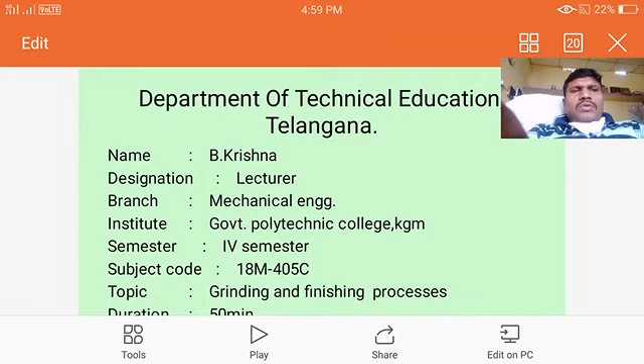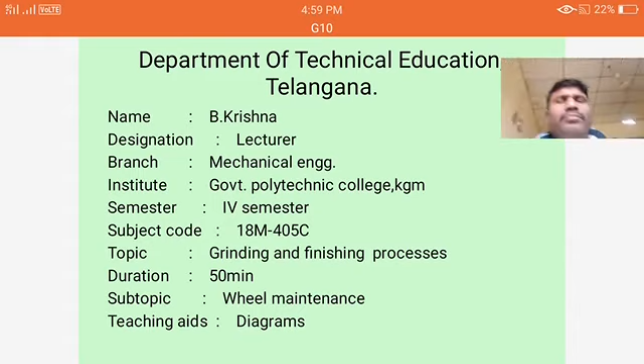Objectives: maintenance of grinding wheel. Wheel maintenance means grinding wheel maintenance, balancing of grinding wheel, dressing and truing of grinding wheels, and coolants used.

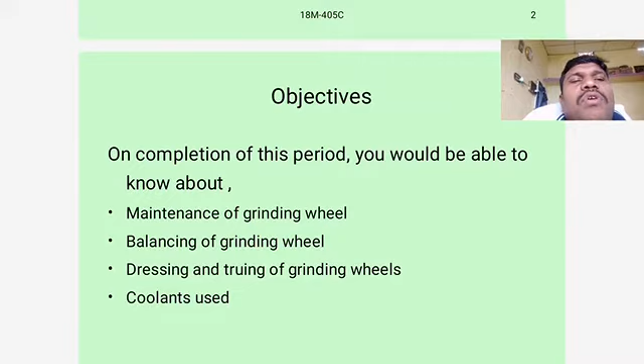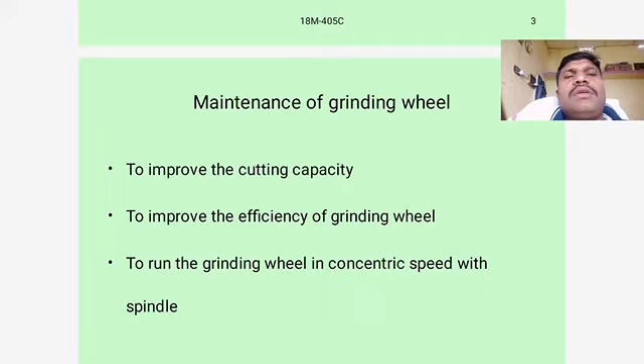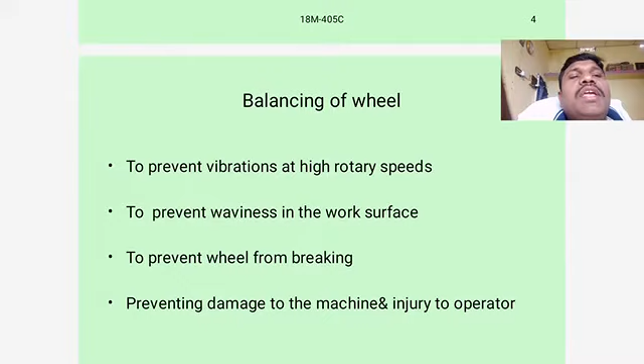Maintenance of grinding wheel is done to improve the cutting capacity, to improve the efficiency of grinding wheel, to run the grinding wheel in concentric speed with spindle, to balance the wheel to prevent vibration at high rotary speeds, to prevent waviness in the work surface, to prevent wheel from breaking, and to prevent damage to the machine and injury to the operator.

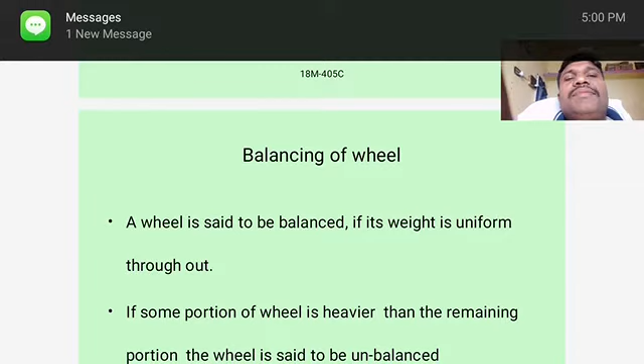Balancing of wheel: a wheel is said to be balanced if its weight is uniform throughout. If some portion of the wheel is heavier than the remaining portion, the wheel is said to be unbalanced.

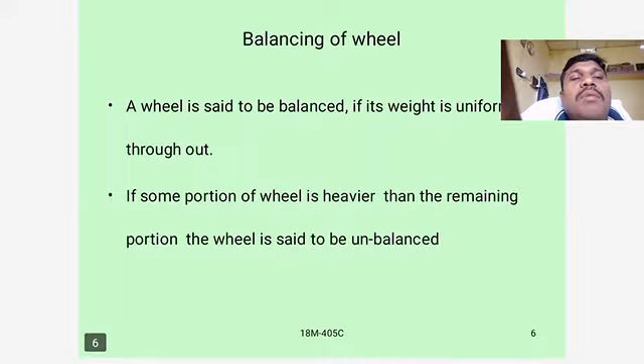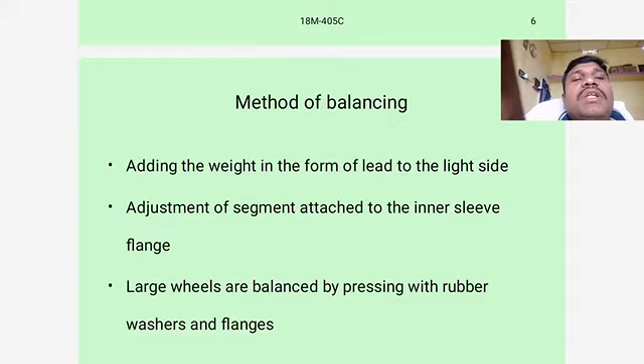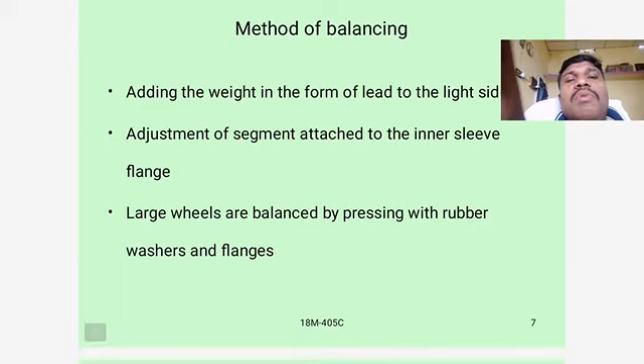Method of balancing: adding weight in the form of lead to the light side, adjustment of segment attached to the inner sleeve flange. Large wheels are balanced by pressing with rubber washers and flanges.

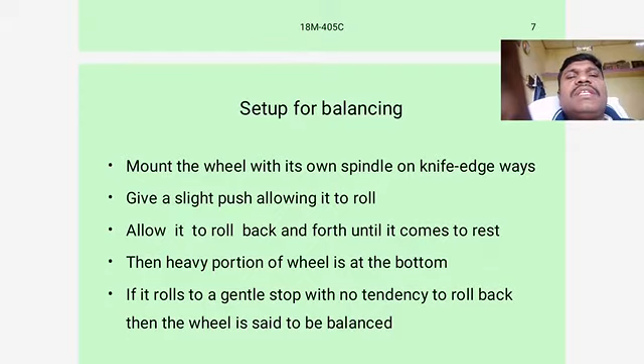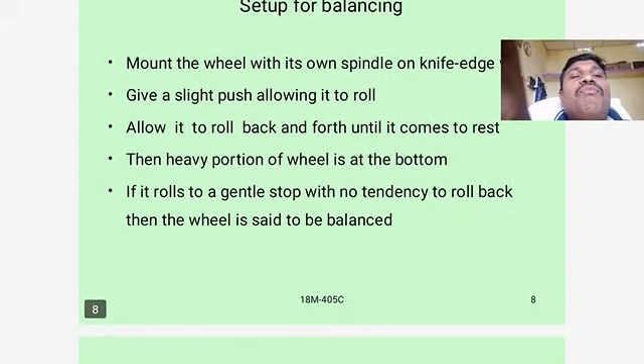Steps of balancing: mount the wheel with its own spindle on a knife-edge ways. Give a slight push allowing it to roll. Allow it to roll back and forth until it comes to rest.

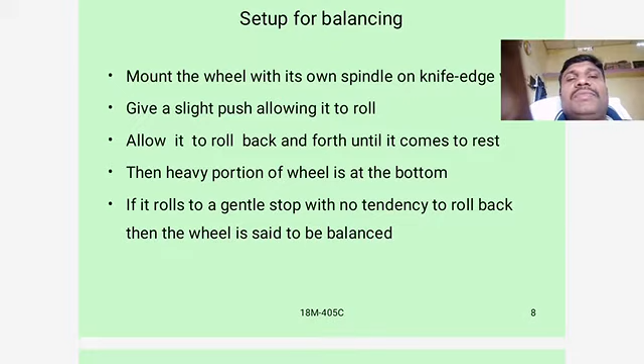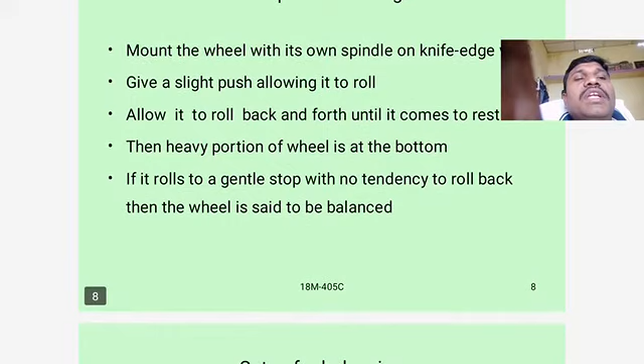Then a heavy portion of the wheel is at the bottom. If it rolls to a gentle stop with no tendency to roll back, then the wheel is said to be balanced.

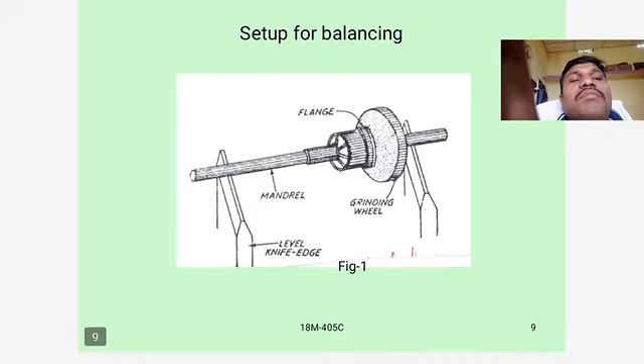Okay, set up for balancing diagram, like this. And the dressing of the grinding wheel: with the passage of time, the grinding wheel's cutting capacity becomes lower.

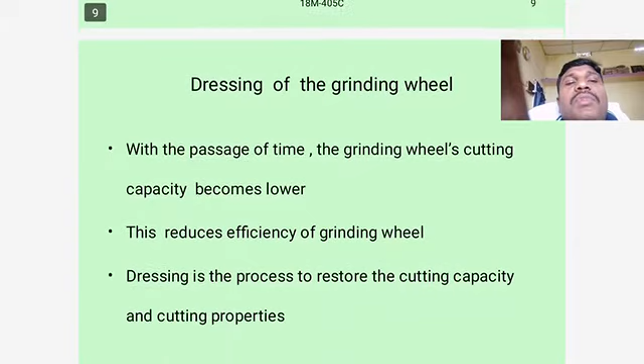This reduces the efficiency of the grinding wheel. Dressing is the process to restore the cutting capacity and cutting properties.

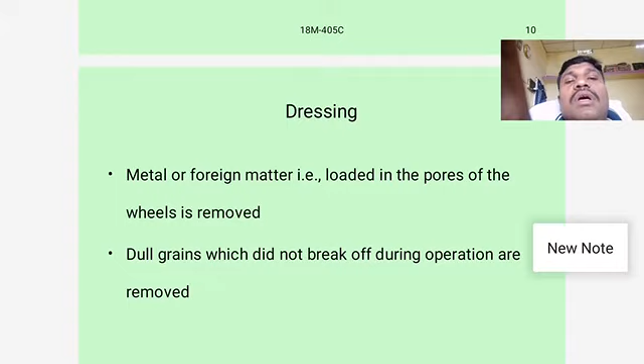Dressing: metal or foreign matter that is loaded in the pores of the wheel is removed. Dull grains which did not break off during operation are removed.

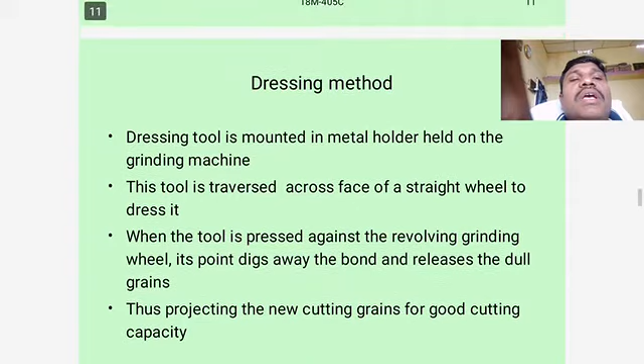Dressing method: a dressing tool is mounted in a metal holder held on the grinding machine. This tool is traversed across the face of a straight wheel to dress it.

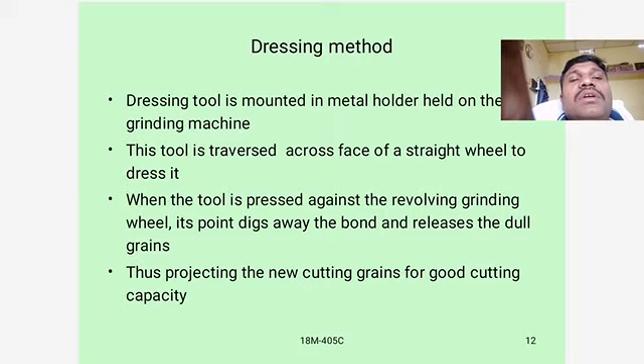When the tool is pressed against the revolving grinding wheel, it digs away the bond and releases the dull grains, thus projecting new cutting grains for good cutting capacity. Grinding wheel dressing is done like this properly.

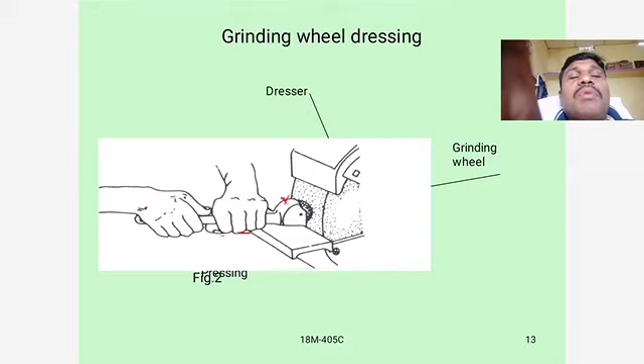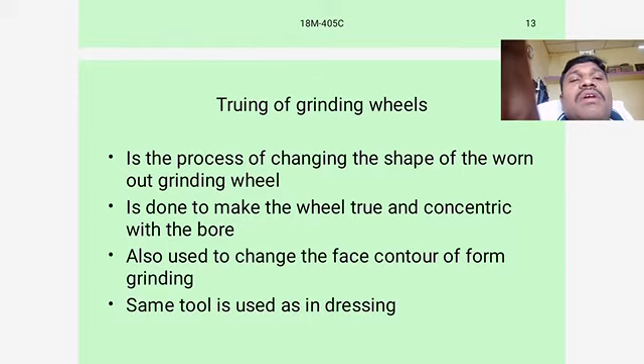Truing of grinding wheels: this is the process of changing the shape of the worn out grinding wheel, done to make the wheel true and concentric with the bore. Also used to change the shape or contour for form grinding.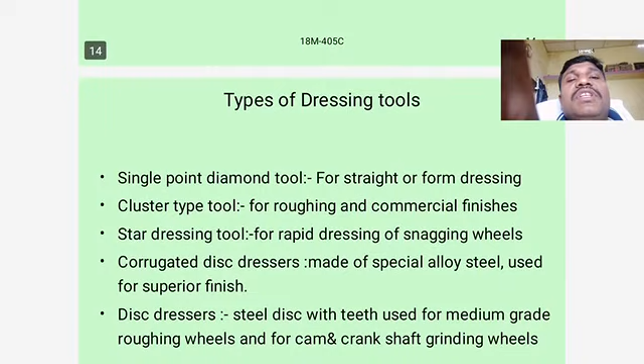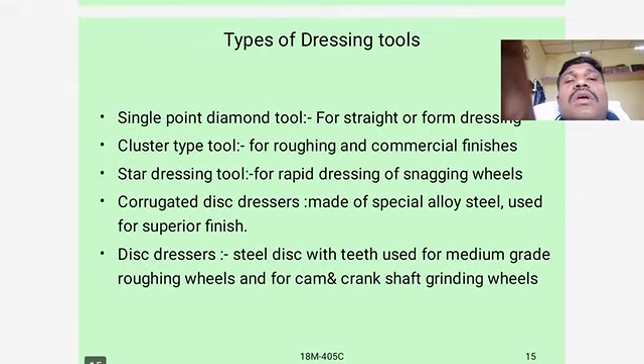The same tool is used as in dressing. Types of dressing tools: single point diamond tool, cluster type tool, star dressing tool, corrugated disc dresser, and disc dresser.

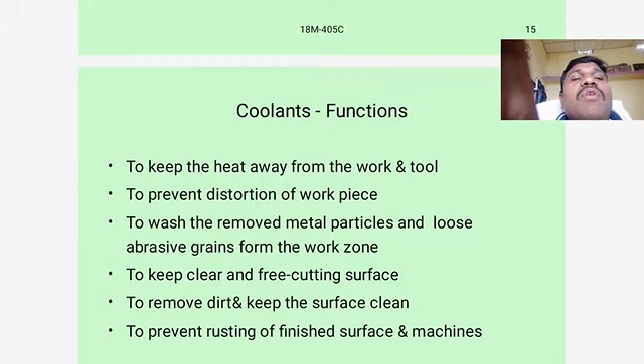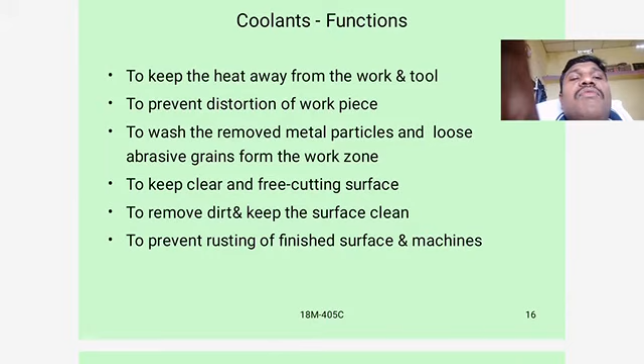Coolant functions: to keep the heat away from the work and tool, to prevent distortion of the workpiece, to wash and remove metal particles and loose abrasive grains from the work zone, to keep a clear and free cutting surface, to remove dirt and keep the surface clean, and to prevent rusting of the finished surface and machines.

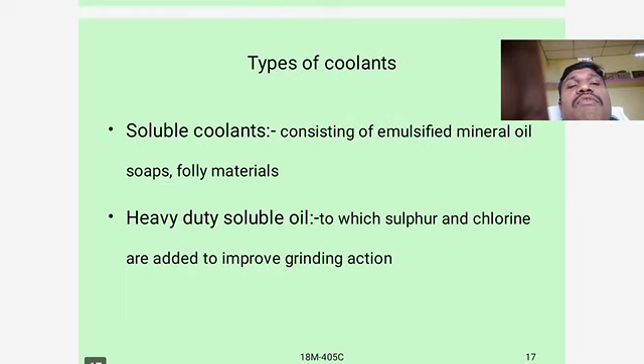Types of coolants: soluble coolants consisting of emulsified mineral oil, soaps, and folly materials. Heavy duty soluble oil to which sulfur and chlorine are added to improve grinding action.